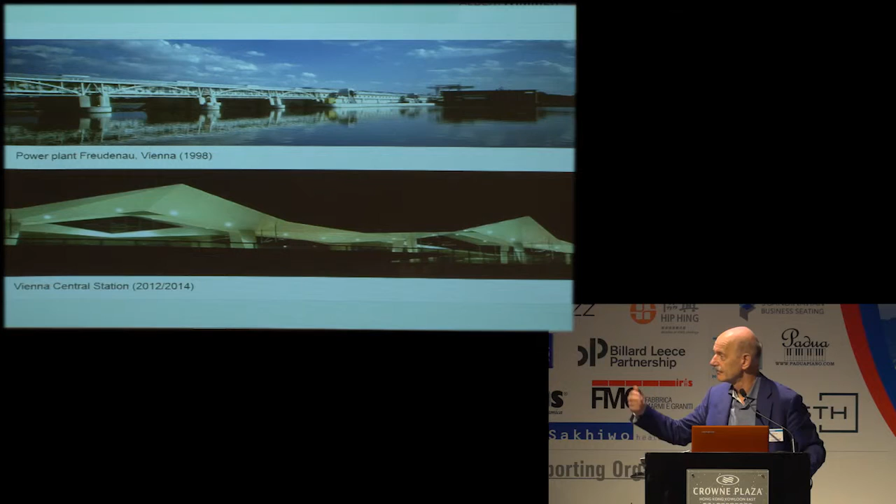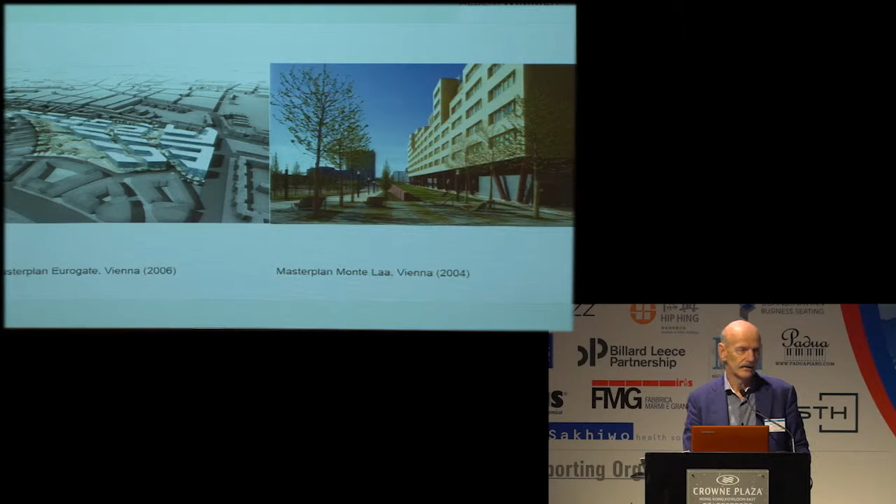To provide you with a short overview of the topics our atelier is working and concerned with and specialized on, you see our devotions, and our devotions are related to infrastructure, to sport facilities, and also, of course, master planning and dealing with open space.

The hospital will be one of 7 specialized hospitals in Vienna, establishing a partly new set of priorities in other hospitals, combined with shifting existing hospitals and departments from their present location to the Vienna North Hospital, and is improving the healthcare services significantly. The new hospital, with its central piazza in front of itself, helps to embed the healthcare facility with its urban surroundings and offers an invitingly open space for everyone, not only those who are connected to the hospital in either way.

In this regard, the organism of Vienna North Hospital, I will explain then in the next pictures, will be an included part of the city, as each hospital of the future, I think, has to be.

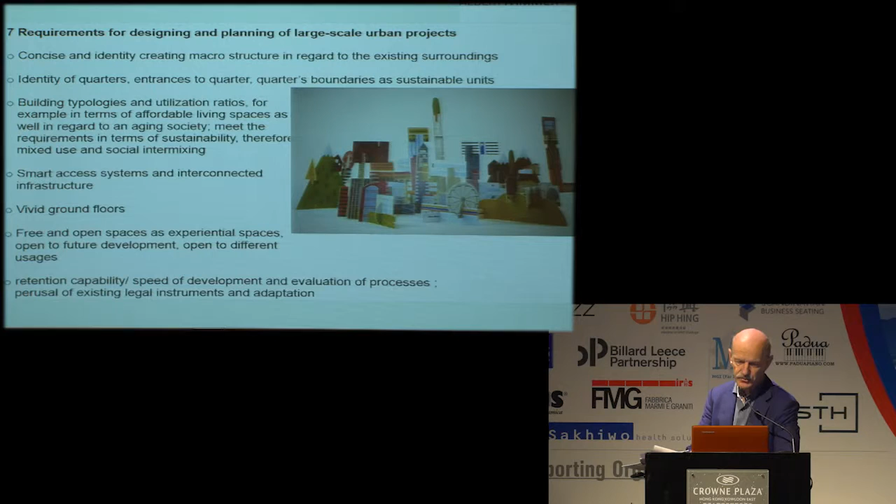When we are speaking about creating healthy cities, as we did a lot in the last 3 days, we should be very aware of the requirements in terms of planning and realization. And taking out of our internal aims, I just want to say we're thinking so much about identity of quarters. And we are so much thinking about values, creating values in terms of realization.

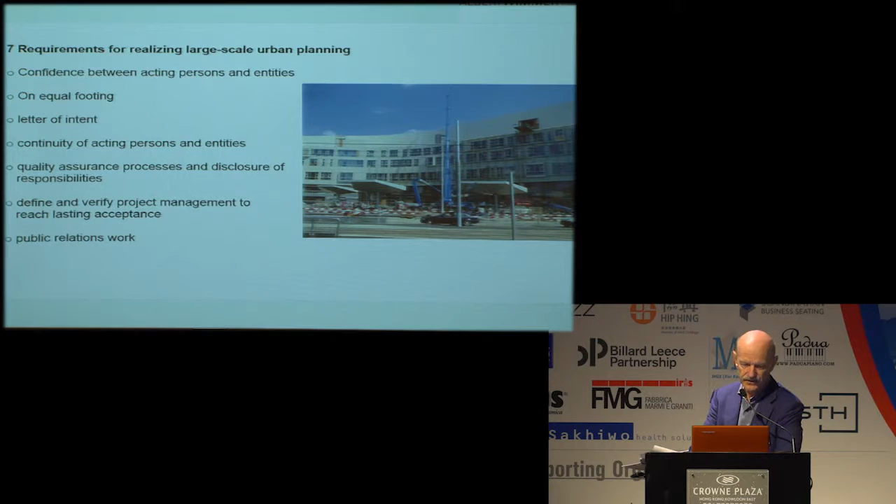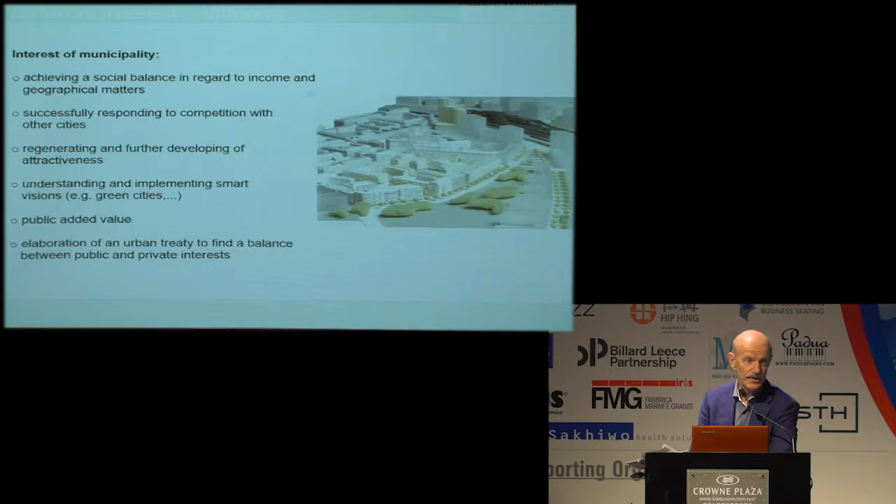And that means our responsibilities. And speaking about responsibilities, it's even more to distinguish between the different interests and to moderate at an early stage between different interest groups. And as you know, interests of municipality, interests of citizens, and interests of real estate developers might be conflicting. But there is always a chance to moderate them and to get a win-win situation for all of them.

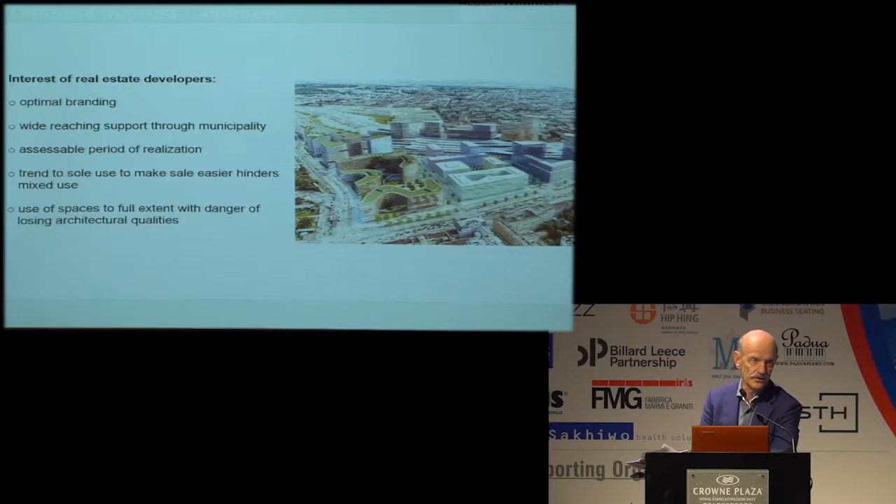As I mentioned before, there are requirements. In this specific case, as we are doing the key project at the moment, the hospital should be part of the city. It should be more than a hospital. Of course, the salutogenic design approach is the basic, and the final result should be a health quarter and a sustainable area.

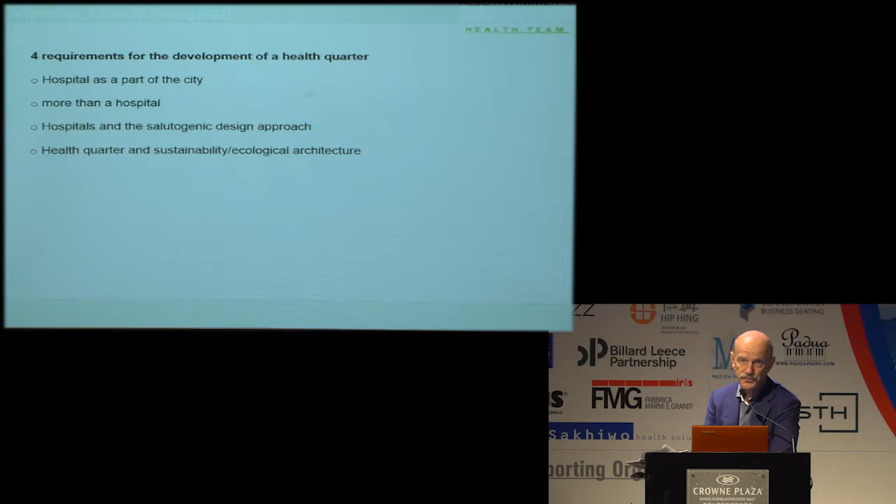So my first important message was, in this situation, we don't transfer, we have to transform the whole system.

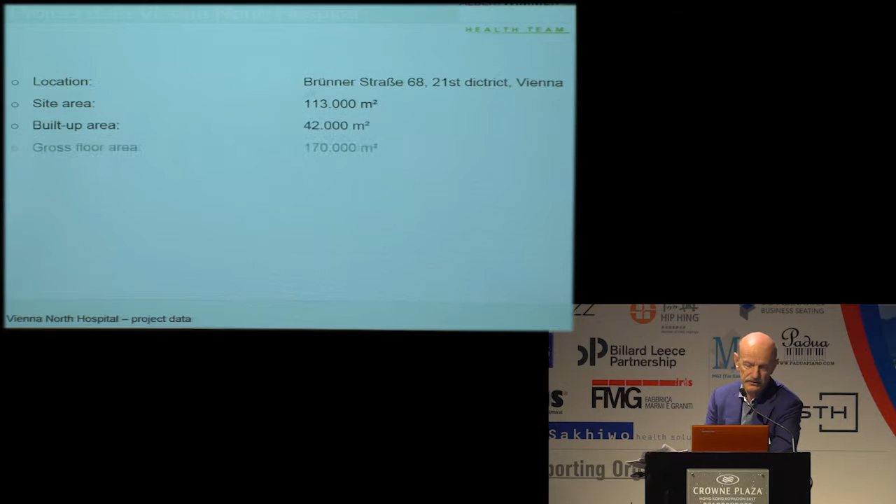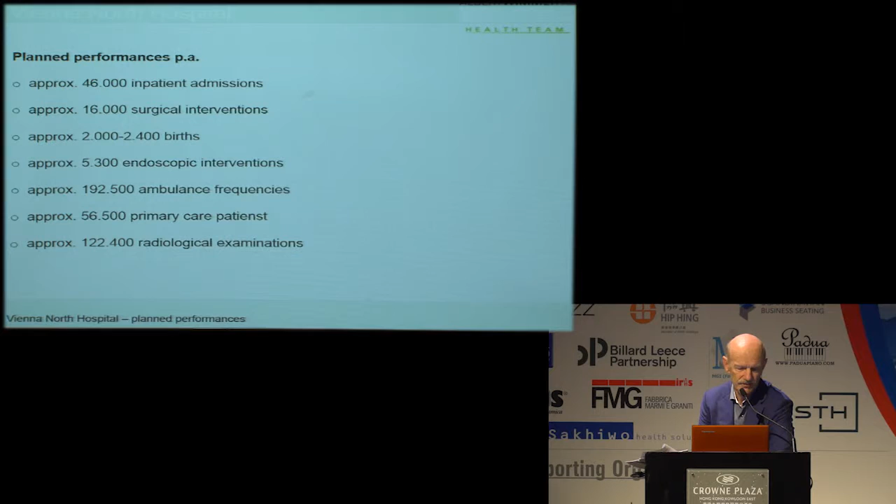To give you some figures about what we are dealing with: it's about 2,000 up to 3,000 people working there at the moment. We have ambulance frequencies of about 200,000, and primary care patients about 50 to 60,000.

But let's now explore the site where we're working. You see, in terms of sustainability, that at this very moment we are just using a quarter of the brown field, which is in the middle of a city that is in the middle of an area of tremendous expansion, because the city is growing very fast according to the role between East and West.

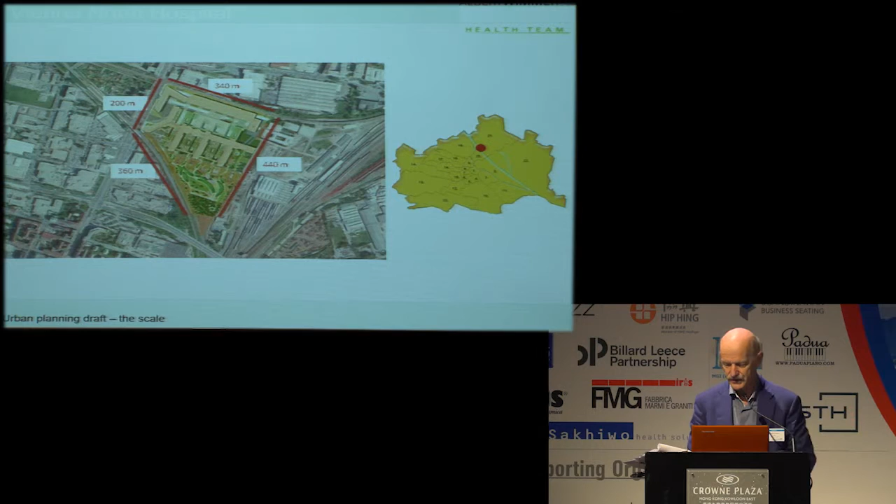Please notice, I learned it yesterday, we have a curved entrance building. It's not a straight line, it's a gesture which says you are welcome. Notice also these little bits and pieces on the piazza, which has nothing to do with the hospital, but is an urban contribution to the city itself. Look at the parasols, the benches, the trees - all results of debates with the neighborhoods. The furnishing aims to create a well-being zone for everyday use, open to the public.

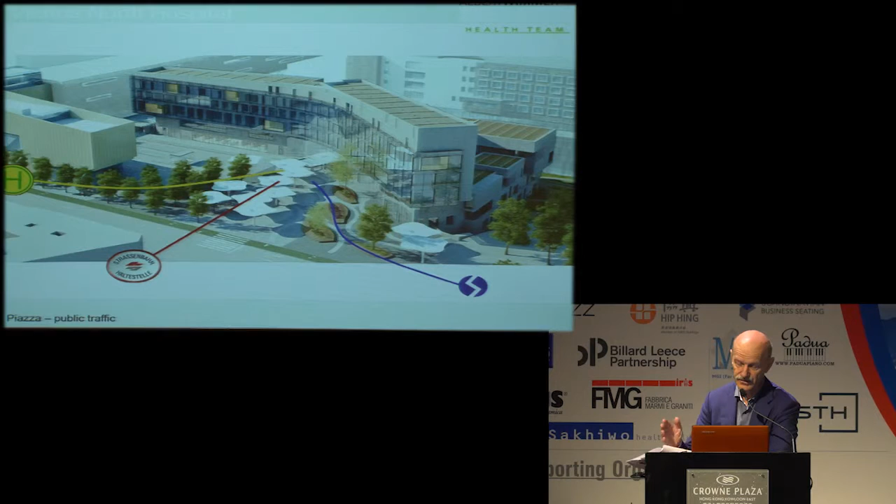So what was the idea? The idea was that once the public uses this area, we'll overcome the 19th century, where we had walls around areas just to define them. Now we open them, and they will lower anxious situations, because hopefully none of us has to go to the hospital, but if one goes, one knows where we are.

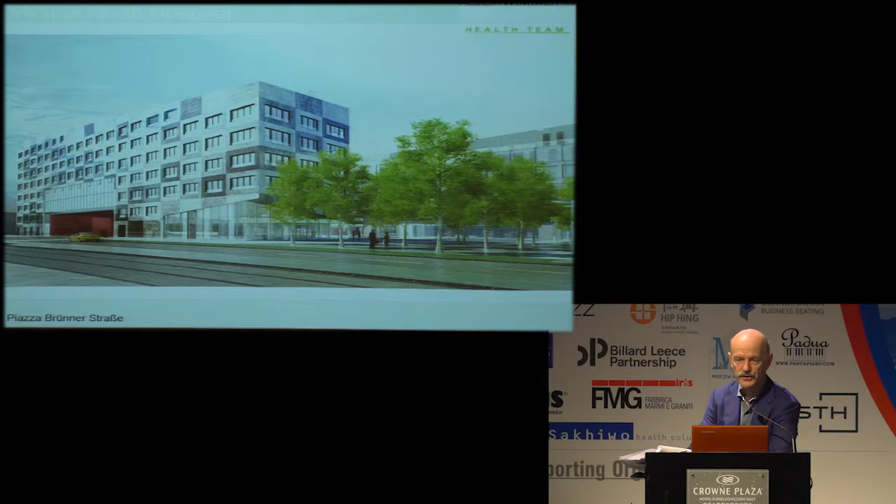All projects we are doing are offspring of competitions. This building is used as a sort of filter to the hospital, and it's a surplus in terms of residential units - you can call it a patient hotel. It's a surplus in terms of medical practices, rehabilitation rooms, and further things which lead to the community. So it's a link between the community and the hospital itself.

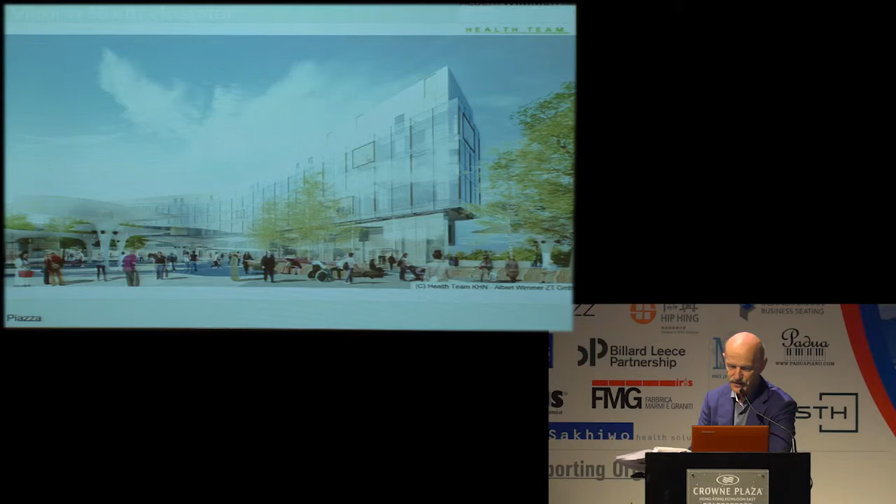Once you see these pictures, you see immediately what was mentioned so often in our conference: easy orientation, best orientation and light - and the best is daylight, of course. So it's flooded by light, as we like to say, and I will show you more pictures on that later.

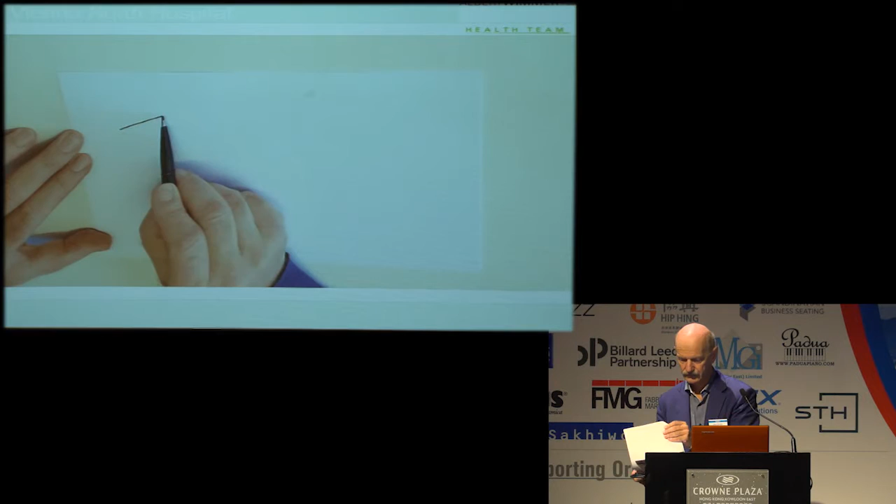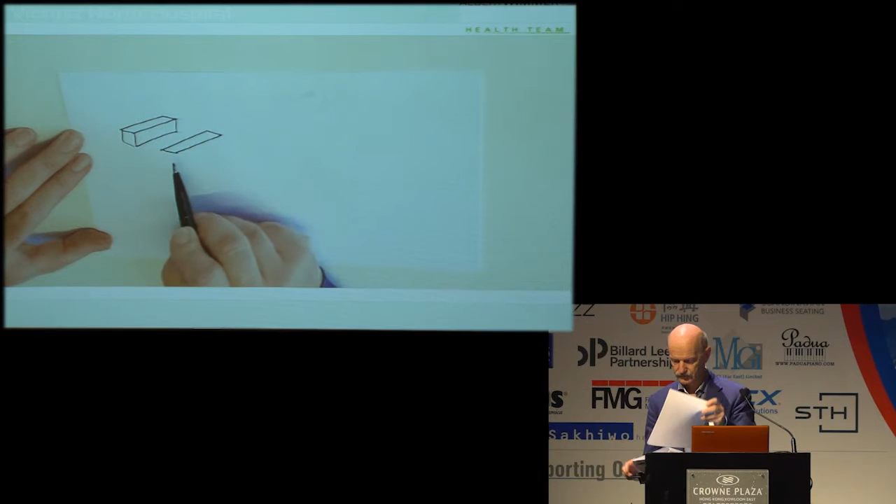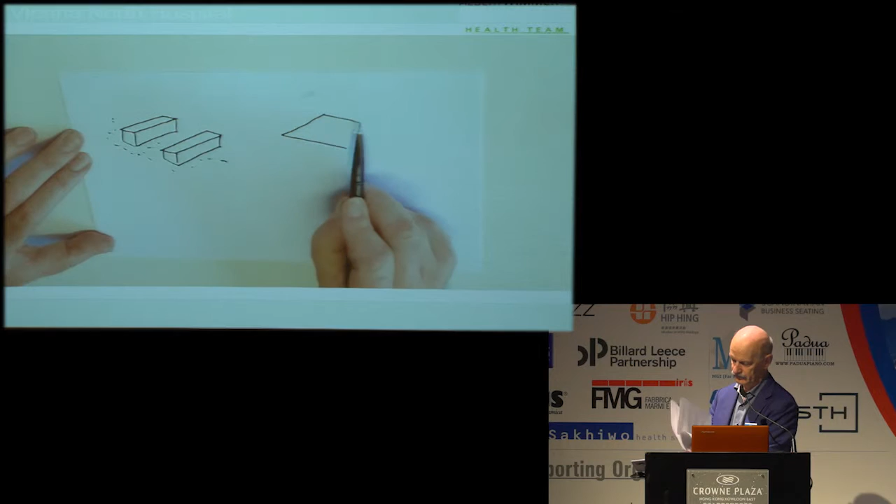Vienna North Hospital aims to achieve an optimal symbiosis between a pavilion-type hospital, as was common in the beginning of the 20th century, and a central hospital. Both designs feature specific advantages. The pavilion type is characterized by high individuality and generous green space. Central hospitals, often constructed as a podium structure on the basement floor, provide short distances.

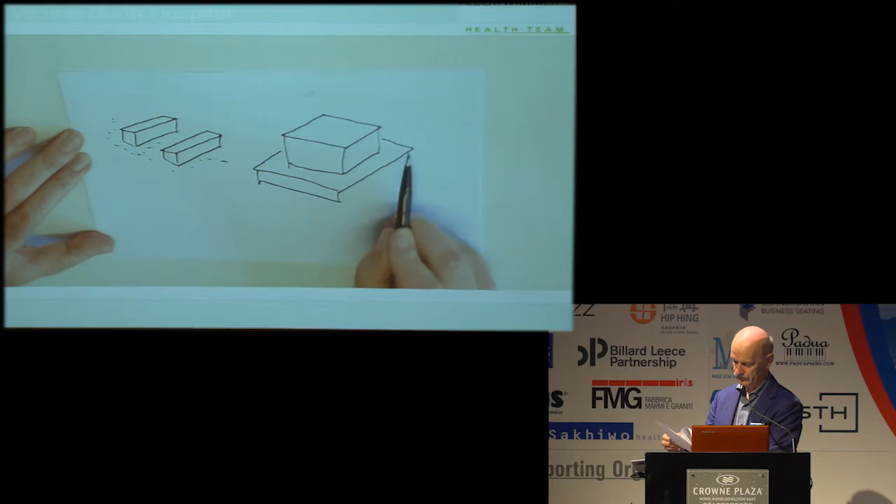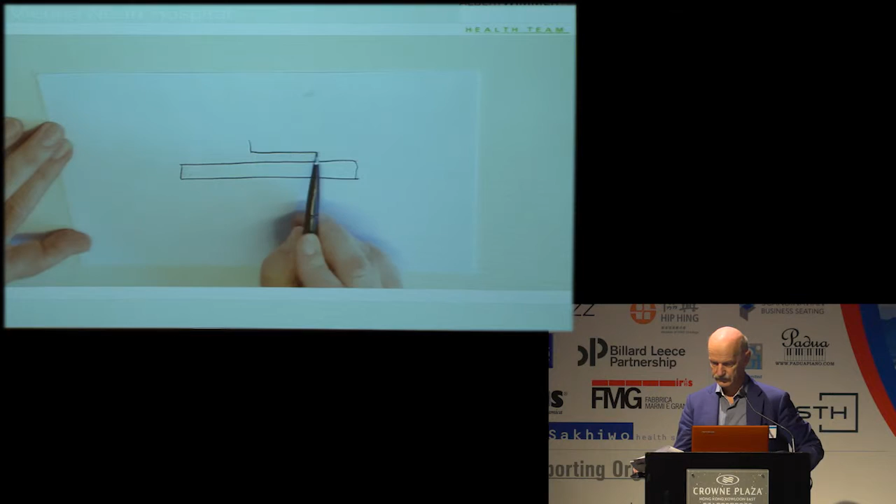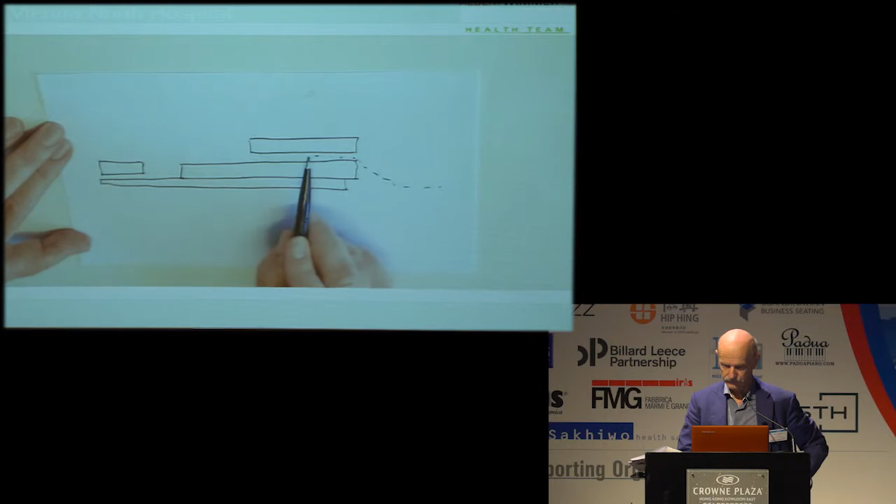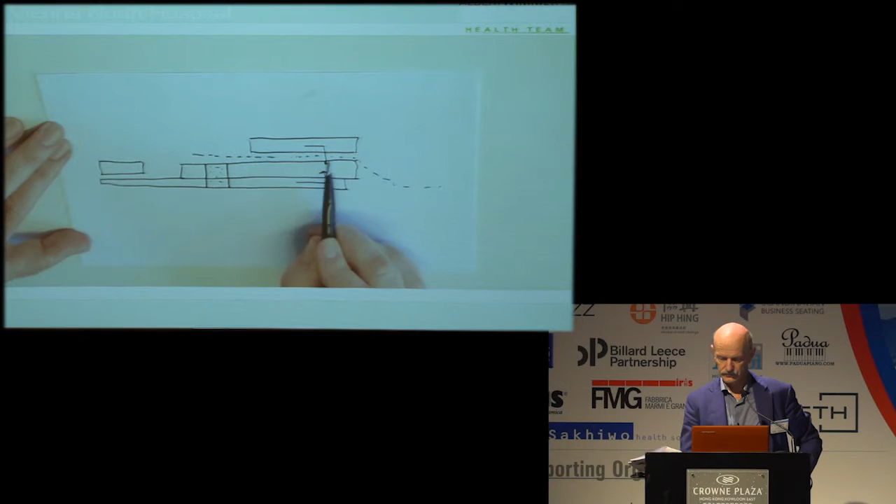How did we now combine these very different concepts? This symbiosis is accomplished by constructing a podium on which a so-called free floor, used as a promenade deck, is located. Above that floor, the bed wings reach out towards the healing garden. In order to network the departments with the required supply facilities, Vienna North Hospital is equipped with a driverless transport system. The landscape design unites the ideas of well-being, healing, growth and recovery in a holistic rural concept that extends through the whole hospital. Roof gardens and light-flooded atriums affect each part of the building and make nature tangible. The design enables an optimal solution for workflow and organizational processes, as well as full supply via short distances, both horizontally and vertically.

So in terms, Vienna North Hospital aims to achieve an optimal...

Not again. We'd like to continue because time is short, as we experienced.

The creation of a healing environment includes, as we mentioned, healing gardens and the use of healing art. This was of extreme importance in our project, with therapy gardens designed according to the whole concept of the hospital.

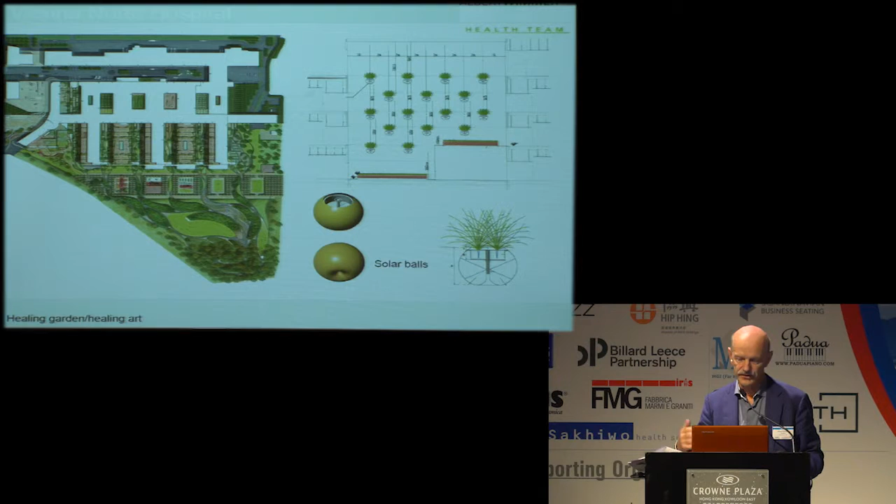But most important, atriums have been placed everywhere, so every working place has daylight without exception. The park is sort of flooding the whole building—it's not just a terrace or an entrance situation, but a combination. That's what we mean by networking: connecting space, connecting pathways, and connecting people.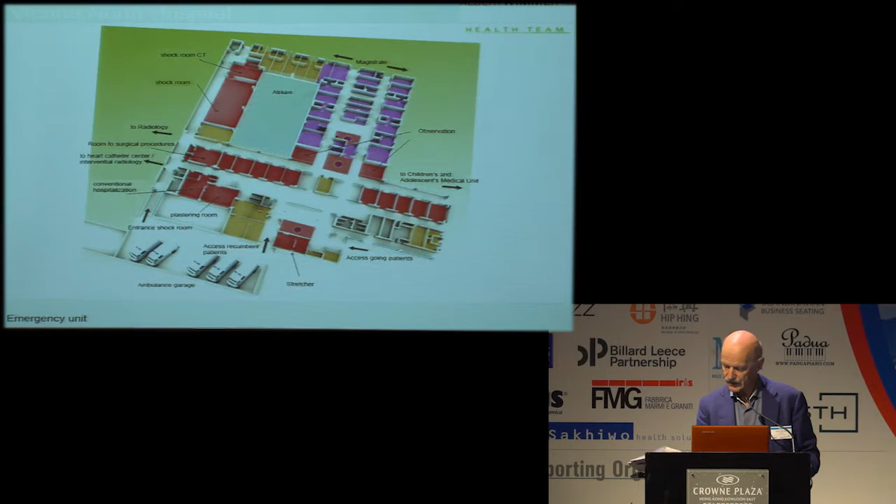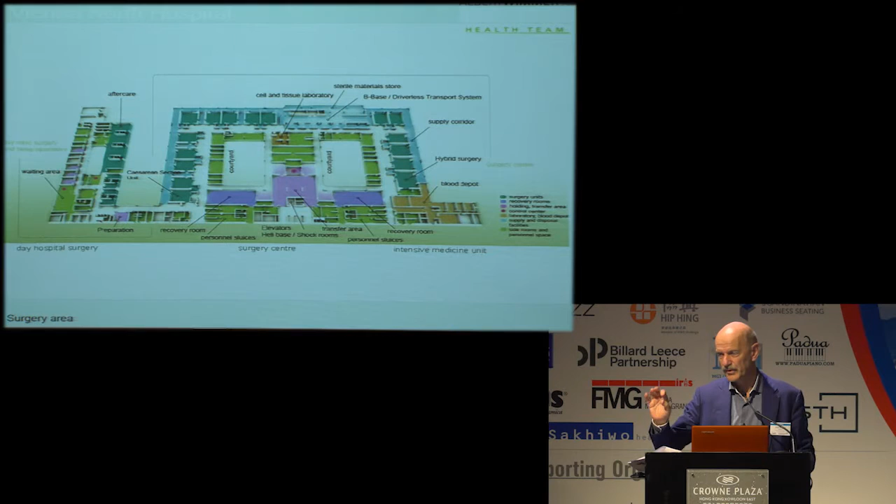Another important point was the creation of an interdisciplinary emergency unit, which has a lot of impact on how the whole hospital is run. Also, as I said, the surgical area was organized in a U form, so that every operating theater has daylight. These advantages we wanted for every room.

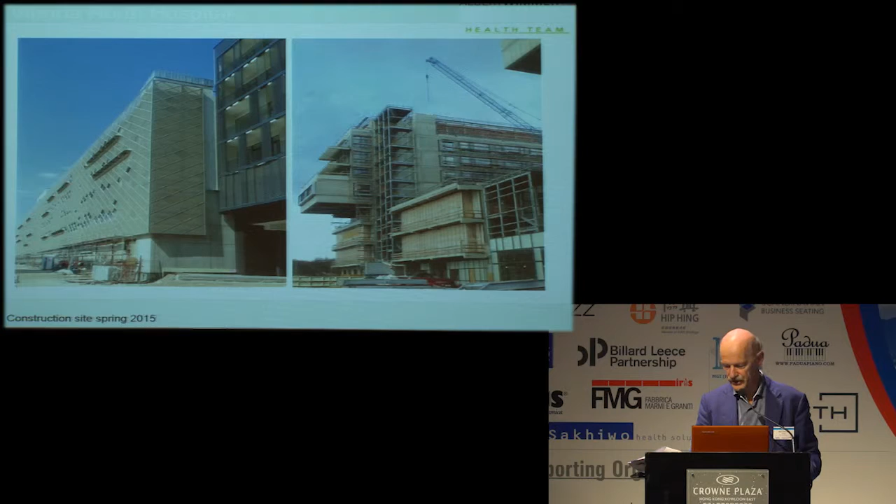Some pictures from the site at the moment. As I said, easy orientation is important, and that's supported by the furnishing elements.

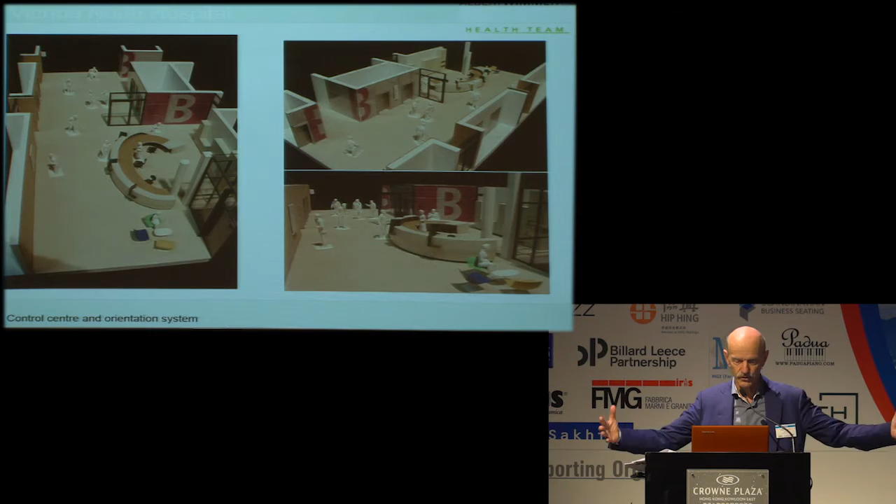These are furnishing elements that don't create barriers or separation, but show openness. There's another issue we defined, which I think is a sort of invention—let me briefly explain the mobile cabinet.

The overall design of Vienna North Hospital and its equipment is determined by the vision that the patient comes first. Sustainment, self-reliance, personality, dignity, and identity are crucial points in making Vienna North Hospital a feel-good hospital.

For this hospital we developed a mobile cabinet, an entirely new piece of furniture that works as a detached and movable cabinet and escorts the patient on all their ways. That means all their belongings stay with them, and they remain a personality—not nothing in the hospital, losing their identity, but retaining a strong one. This cabinet goes with the patient wherever they move, whether to the X-ray station or elsewhere.

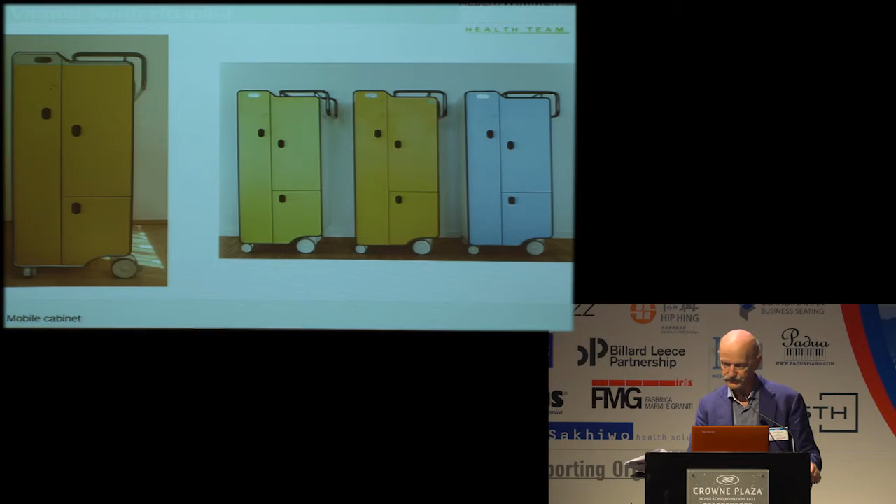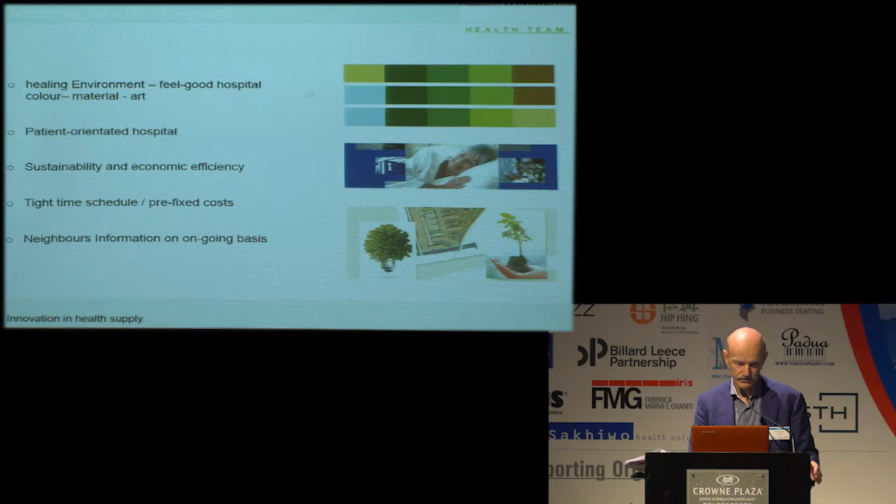To come back again—what have been the major issues? Community placemaking, patient orientation, healing environment, and, as well said, staying on time and on budget. Of course we also applied all the criteria of sustainability; there was an extra group working on that.

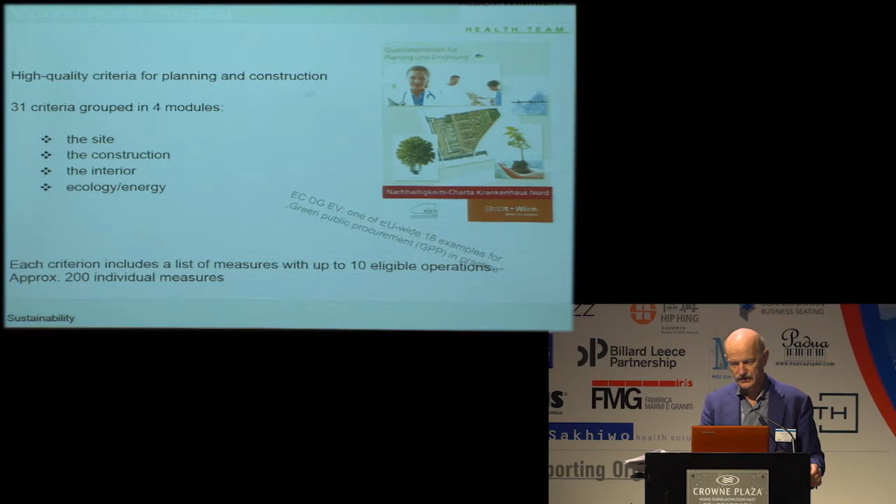At Vienna North Hospital there's particular emphasis on the recovery phase and the great atmosphere—the colors, scents, and views all contribute to that.

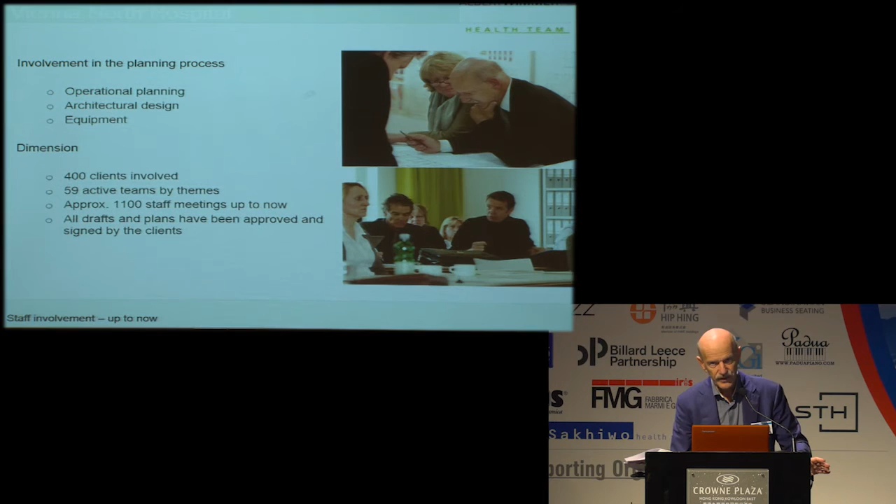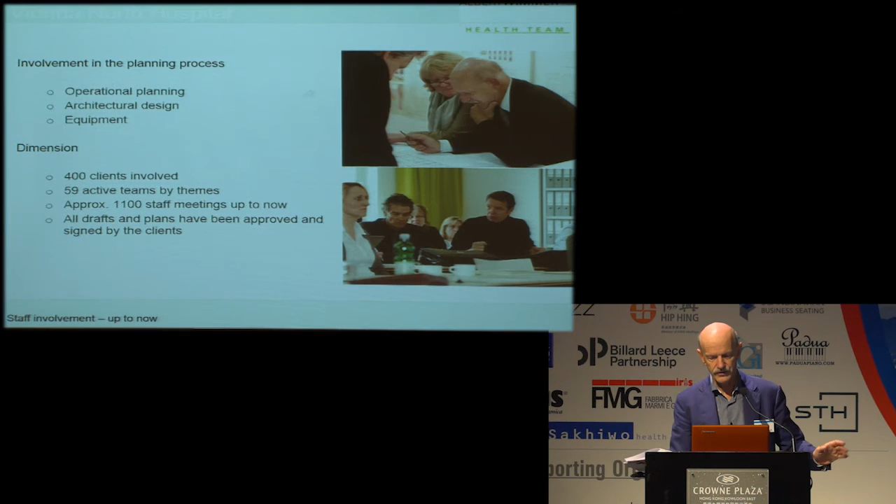As patients, we were involved in the project right from the start, meaning involvement throughout the complete process—all the staff, all the patient groups. Up to now we've had much more than 1,000 meetings with all the teams. That was quite a new experience for us, but it paid off for many reasons. These pictures show what those meetings looked like—it was a crucial point for us.

So, at the very end, let me make a remark. Until now we've been discussing outstanding presentations, very interesting and extraordinary research works. I think our project, Vienna North, meets a lot of the mentioned postulates. It would be a dream—and well worth pursuing—to take research works, investigation techniques, and evaluations forward for the Vienna North project. So if there's any chance, it would be a great pleasure. Thanks for your time.